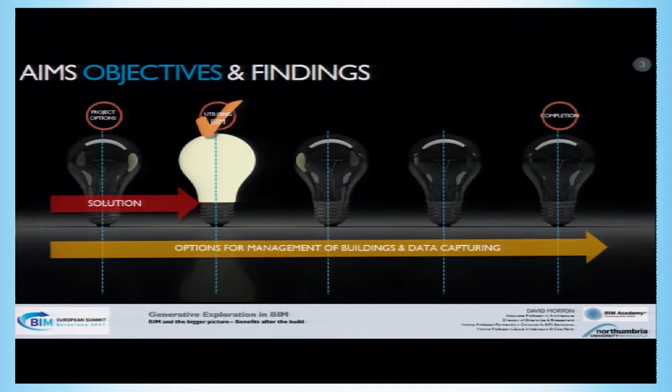What we've looked at with this research is how to utilise the data and how to capture it in a format that lasts the longest and allows us to have those moments of intuition when we think, let's go and try that out, let's go and try this avenue out. And no door closes. In fact, more doors open throughout the process.

So in terms of what I'm going to talk about, hopefully for the next 15 minutes or so, is looking at changes in terms of perception, eBIM, scan to BIM, heritage BIM, and then focusing on the case studies, those three main timelines there, and then with a little clock at the end, hopefully being on time about 10 or 15 minutes.

In terms of BIM, to give you some context - it's to aid construction, a new process to support and encourage collaboration, and in terms of improving efficiency and accuracy, that's a really important one that I'll take all the way through. Also to reduce waste and cost.

Now that's applicable to new build, as we've heard today, but in terms of heritage BIM and digital capture of heritage, that is also really important, and I'll go through that in the case studies in the later slides.

In terms of developing rich models, we've heard about that again today. But in terms of heritage BIM and scan to BIM, there's opportunities within this environment to capture huge amounts of data at fantastic levels of accuracy we've never perceived before. When I was a student 20 plus years ago, I would never have thought we could capture existing buildings to the level of detail my students capture now when scanning buildings for projects - we're down to millimetre accuracy. I was lucky if it was down to 50 millimetres.

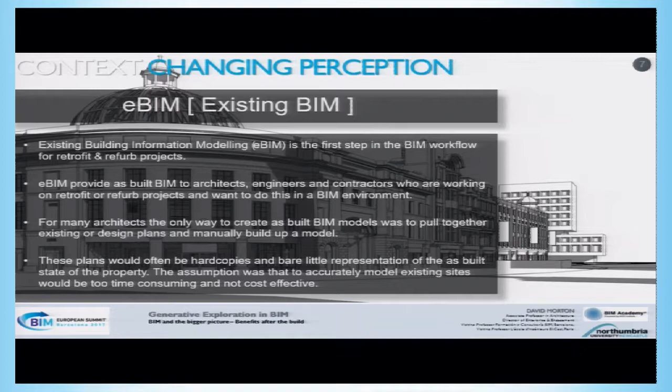What we end up with and what we generate from this is the model itself, and then from that we generate all the pictures, the views, the sections, the elevations, and we abstract them. Whereas before we would have done it longhand, we now have the chance to abstract from one source, as we've talked about, and that's also really important.

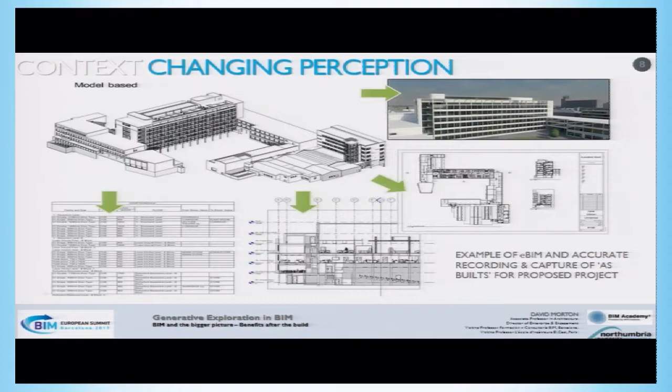On our own campus, we've done what it says on the tin - we are practicing what we preach, as it were. Our own campus has been fully scanned, and all of our buildings are now on a kind of digital campus.

So we can look at ways of looking at energy consumption, even down to looking after things like we talked about this morning - the cleaning, the painting, the maintenance. You can imagine every day we have hundreds, thousands of students going to many hundreds of lectures. Now, if one thing goes wrong, there's a huge repercussion. So on campus, we've got this as a management tool, but that can be used in terms of heritage as well, as a management tool for looking after the buildings. So it's no different.

In terms of research, there's very little looking at BIM in terms of heritage buildings and cultural landscapes, in terms of traditional ways of documenting heritage buildings. It's quite shocking, actually, and quite amazing what little information some people have. English Heritage and so forth, and all the other big players that look after our heritage, they sometimes have very little information, very inaccurate information about the very prominent buildings.

In terms of techniques to bring that forward, scan to BIM and so forth, it's been an absolute godsend. I'll give you an example, in terms of heritage BIM, okay?

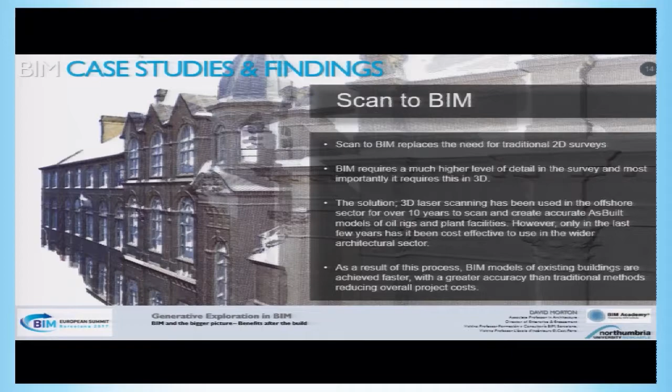In terms of our surveys and the research we're doing, we're finding more and more people wanting us to do citywide scans of various bits of the city, to look at different ways of implementing new road structures or different ways of routing pedestrians, like we've seen this morning.

Another example, outside of Durham Cathedral, there were various elevations in this particular case study that suffered really badly from erosion due to traffic and so forth. Before, it was a case of going there, checking whether that particular elevation had suffered anymore over a shorter period - every 5, 10 or 15 years - but if it was looking particularly poor, they would go back every 6 months, every couple of months, and monitor it.

Now, with the scans we've afforded the client, they have accurate surveys of every elevation, and we can predict far more accurately, with a very fine grain of information, when particular facades will need doing. We can say, okay, within 3 months you need to do this, it's critical; within 4 or 5 months you need to do this; and that budget you have there, don't worry about it, because that elevation doesn't need doing. Looking at the erosion over the last 2 or 3 surveys we've done, you don't have to spend any money for another 18 months or 12, whatever else. So the information is extremely data rich in terms of what the client can glean from it.

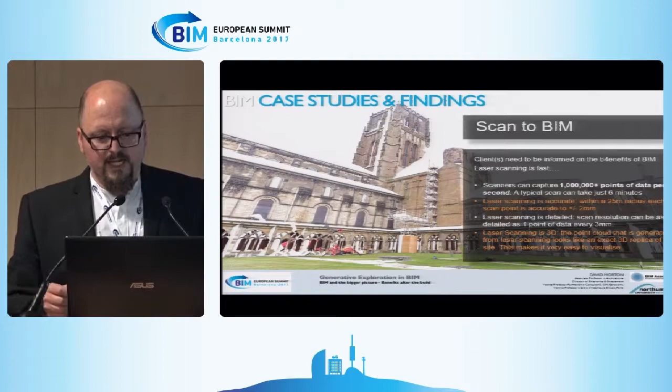In terms of the scanners that we're using, I know this improves all the time, it's the same kind of thing with phones. Typical scanners that we use now capture 1 million points of data, and it just takes 6 minutes. I mean, that's unheard of.

In my lifetime, that's gone from the measuring tapes where you're pulling the tape, and if the guy was really heavy on one side, the tape might stretch a little. She might be a little bit further out on one elevation than another, and you work out why that elevation doesn't quite fit when you go back and do the CAD. Now we don't have that.

It gives us fantastic levels of information. For example, on that third point there, 1 point of data every 3 millimetres, so we can be that accurate.

In terms of a process, this has been talked about this morning, so I won't go on too long. Very simple scan process, sometimes in some elevations down to literally minutes, 6 minutes for some of the elevations. The process itself: take it back to the lab, start to process that, get that into a digital model, and then give that back to the client.

What we do is we talk them through the model, we allow them to understand what they've got. It's a bit like the good old days when you just had the 2D information. A lot of clients can't read drawings, and we forget that. We're part of a larger team where we could share drawings, talk about pictures on the screen, and we all know we're all there. A lot of clients can't do that.

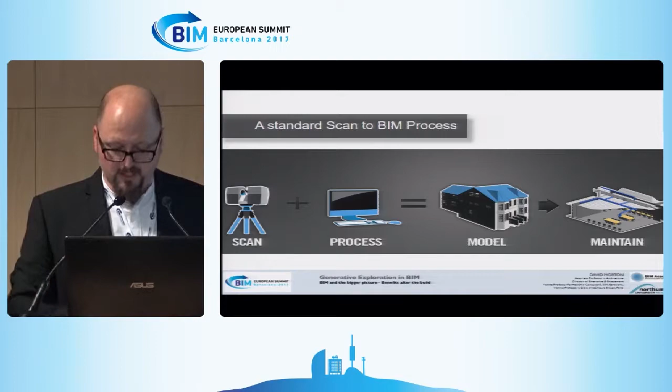When we produce the model and talk it through, it's amazing how clients who thought they knew their buildings understand it at a far greater level. That's a great bit of the process.

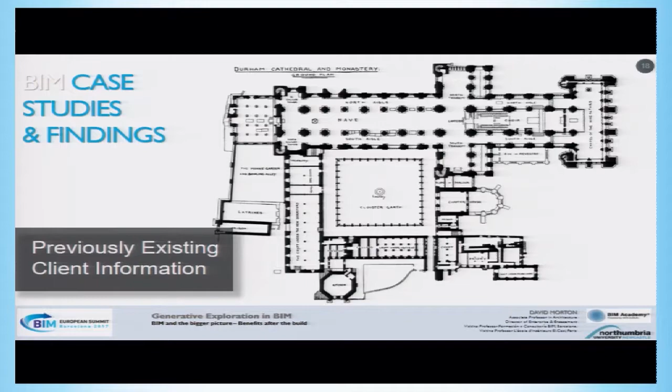I'll give you an example. That's what the client had before. When we went to Durham Cathedral, that was pretty much the only information we had, and some of those drawings, I've actually scanned, were on parchment. So there's a big time scale there in terms of information. It's a long, long time ago.

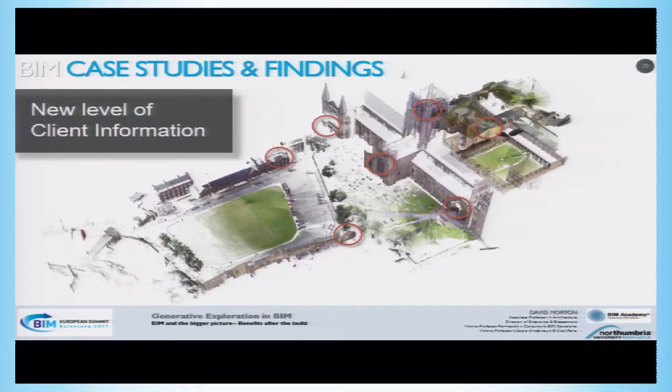What we do now, we scan and produce this kind of information, and a lot of us do this now. All of those points starting to come up on the screen, little circles, were critical points the client never knew were a problem in their own backyard, in terms of facades needing remedial work, stones needing replacing, that kind of thing. That's a great thing in terms of capturing and looking after our digital heritage.

Again, you saw the picture inside the building. This is a scan outside the building, again down to 3 millimetre accuracy. So the client not only has elevations, but accurate elevations, very, very accurate. It's a physical recording of condition, for preservation and maintenance.

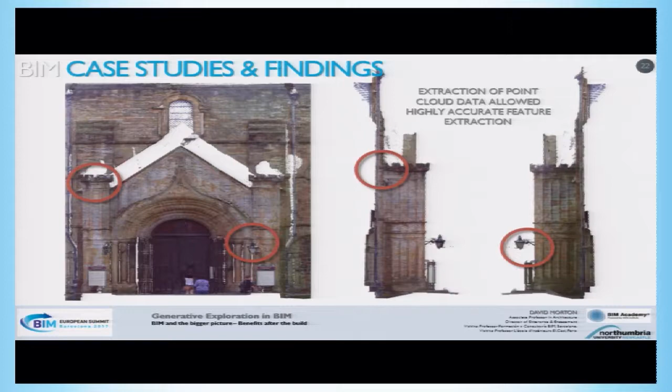Creating not just elevations of the building or parts of the building, but detailed elevations that allow studies to be done and data to be captured in order to maintain. That's a lot more important, really important to think about. The data allows us and affords us the chance to maintain correctly, not just look at a drawing, compare it to the building and make a decision. This information allows you to make that decision straight off the bat.

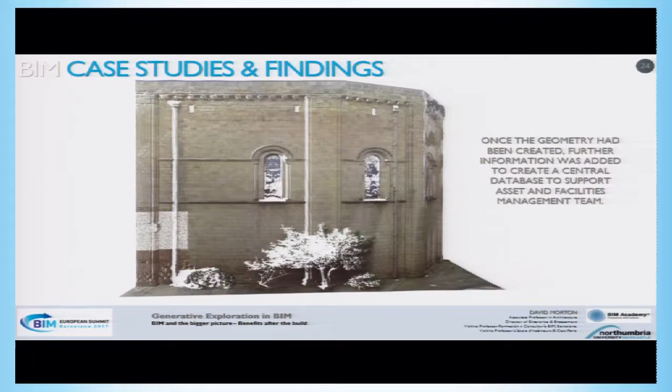And again, in terms of external, once you've captured that geometry, you can add further information. This particular part of the building has various acoustic additions for services and so forth. We can track all of the lighting fixtures and fittings, and give the client a database to assess and look after their assets within the building.

And in terms of condition surveys, doing something very simple, a kind of see-through axonometric of the building, then colouring it in terms of what to look at in 5 years, what to look at in 10 years, and what doesn't really need looking at for 15 years or so.

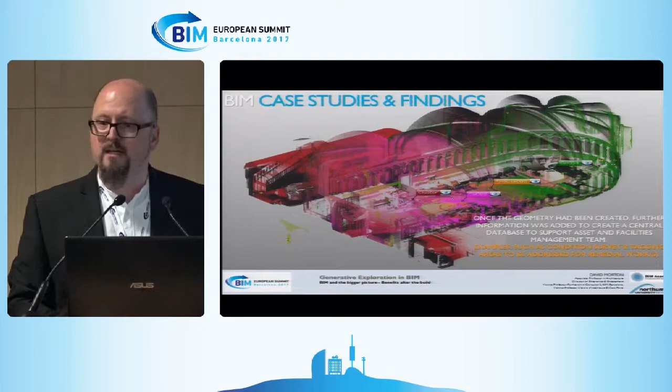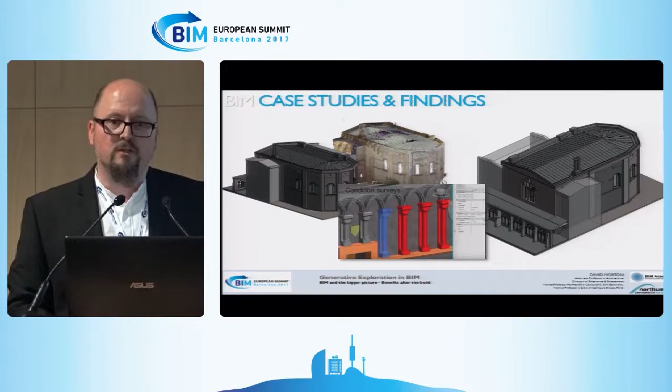And again, from that model, generating sections and elevations for potential structural works and accurately recording those, so that when somebody comes back - a different team, a different company, a different structural engineer, whoever it is - they have records there. They can just pick them straight up and start from the same paragraph, the same page, the same sentence.

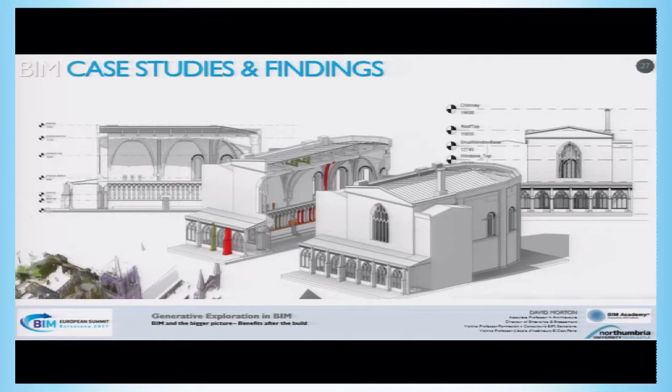Also, in terms of that data, bringing it to a device that the client will want to use. We've noticed this a lot with the research we've done - it's great to provide the information, but then there needs to be a device to hand that over to the client. More often than not, we all have iPads and phones, so we give the client an iPad and they can walk around the cathedral, or any project we've done, and flick through the various bits of information while they're there.

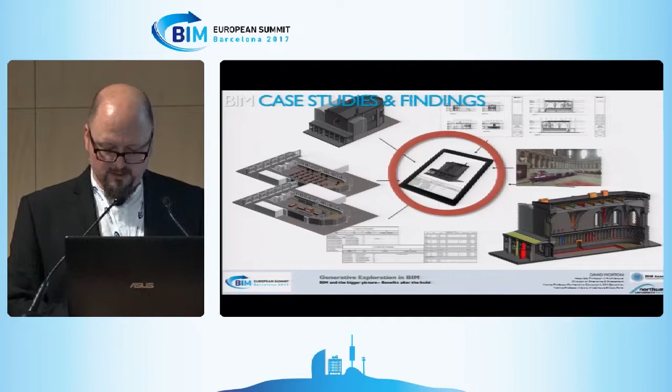There's an immediacy there, there's a level of detail there, that I think BIM, Heritage BIM, and everything else we do really benefits the cultural heritage of what we have around us.

And some case studies, just a heads up on what we found that works. First one, Sydney Opera House. We were lucky enough to win this particular scheme, and we created a full information system that's now embedded in all the operational methods they use for the building, allowing for cost efficiencies and supporting the visitor experience.

It's a bit like with the campus, keeping everything running very sweetly - the whole thing is constantly maintained. So we have a geometrically accurate model, but it's great to have, we also have to make sure that we maintain it. We have an accurate model that is maintained via us at a particular point.

So when they know they're going to do any alterations, we record and capture those. What the client calls stress testing - in terms of potential existing or proposed future operating systems, we can add those into the model and test them in terms of heating, cooling, load, and that kind of thing. Will they work? Won't they work? So that they don't have any issues and have minimal downtime.

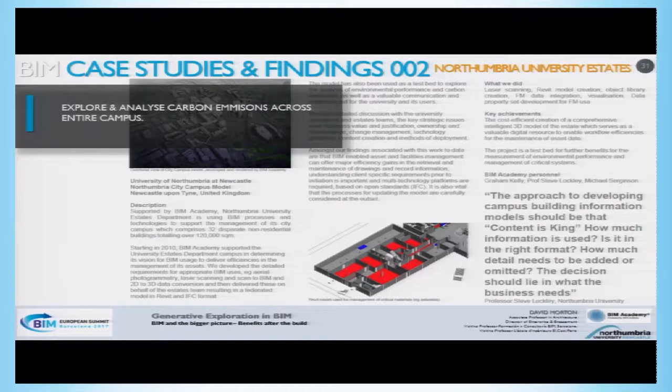And then our own campus, Northumbria, we used it to explore and analyse the carbon emissions across our campus to minimise those, and to look at the intelligent models across campus so that we have an accurate resource for creating additions and changes to the buildings.

I've been at various places you work, I'm sure you all have. If you work there for more than 2 or 3 years, you will notice how many times things get changed. I've been at Northumbria for 8 years and I've moved office 4 times.

In terms of that transition, we've used the model to make sure that not only is the maintenance done on time, but people like myself who work in the university know where we're going, how long we're going for, and that's all charted on the model as well. So in terms of a benefit to the client, it's massive.

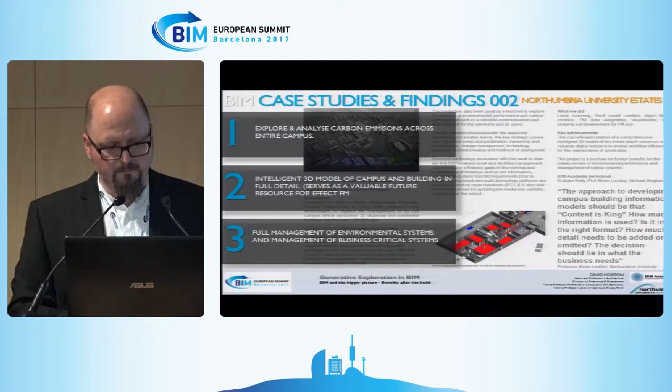In terms of full management of all the business critical systems, we use the same model again to make sure that all of the lecture theatres are used most effectively and efficiently, and if there are any issues, to log those and make sure they're done from one source.

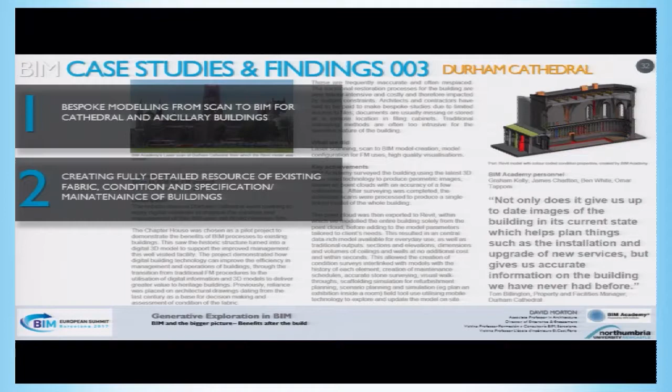And we talked about Durham Cathedral. In terms of that particular case study, that was the bespoke model, scan to BIM, and all the ancillary buildings. That was to create a full detailed resource in terms of fabric condition, specification and management of the buildings, and an accurate condition survey. So the guesswork, or accurate guesswork over 5, 10, 15 years on the quinquennial surveys, is now scanned down to 3mm accuracy and planned far more effectively in terms of client spend. The final case study, on a bigger scale, actually ties in with the keynote today.

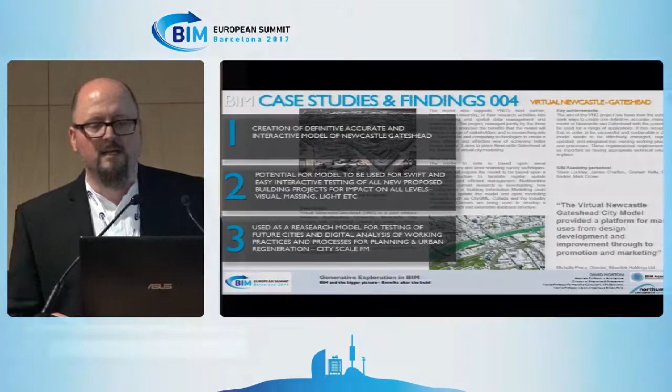Newcastle Gateshead. Many cities have the issue where you have brand new projects and you want to take out a part of the city and put in a new building. How many times do we have issues where people stand up in a planning meeting and say, I don't believe that building's that high, I don't believe that building will overshadow my building, or this will happen, or that'll happen. What we've done is accurately model the city to allow any projects to be modelled within the virtual model before the physical is made. So there's potential for swift and easy interaction with testing of those, and also for looking at future potentials in terms of digital analysis of different processes, planning and urban design of the city.

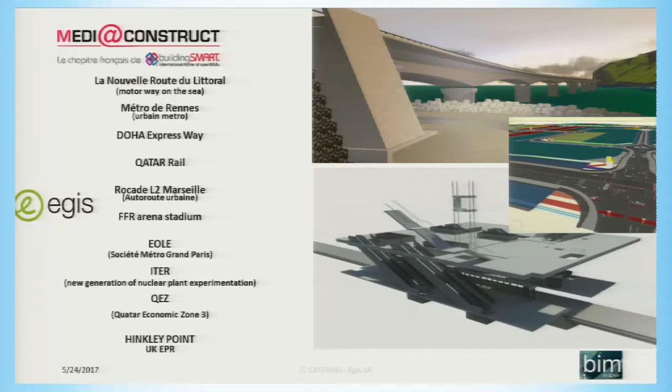BIM now - Egis is a company of engineering consultants, around 1 billion of turnover per year, now more, and 60% of our activity is not in France. But in BIM, what does it mean today? That means all of our crucial major projects are under BIM, all of them. That means today it's not less than several dozens of billions of euros of works managed by Egis under BIM. So BIM is not the future; it's really involved.

So what I'm going to explain is, first of all, what are the processes and principles of BIM we are using, based on our experience as professionals, but also as part of our development and research on BIM. And I'm going to explain two business cases. One about the motorway in Marseille - we won the first BIM award for infrastructure projects in France with this project a year ago - and the project about Société du Grand Paris, which is one of the biggest projects in the world for railways. It's more than 25 billion of works together, with not less than 21 tunnels under Paris over the next 10 years.

So our approach to BIM is oriented around the question of the BIM execution plan. We're familiar with that, and when we say that, we are mixing two references. The first one is the ISO 19650, which is not yet approved in ISO, but is mainly based on the British standard 1192, which is important to note. The name of that is 'information management using building information modeling' - so everything in the title is important.

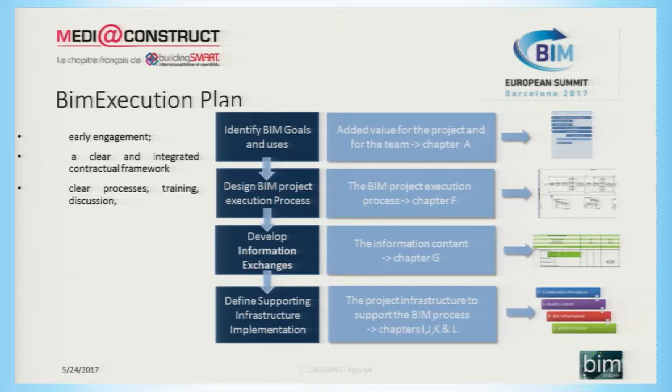Full BIM - we have some reference requirements from the client saying full BIM, but I don't know what that means. Nobody is able to say what full BIM means. So you have to identify, according to your project, why you are using BIM and for what. In other terms, identify the BIM use.

Because BIM use also means added value according to the process. Then you have to describe the processes themselves, and then develop how you are going to exchange the information. In this part, that's the way we mix British standard or ISO 19650 with Penn State. And then define how you are going to work, the infrastructure of the BIM.

The keywords are the following: the definition in the ISO standard is the use of structured data and information to support the delivery of a project and operation of an asset.

That means in our activity we are going to deliver two things, two assets: the real one, the construction, and the virtual one. That means the delivery of BIM is also a value, also a delivery, also an infrastructure to be managed.

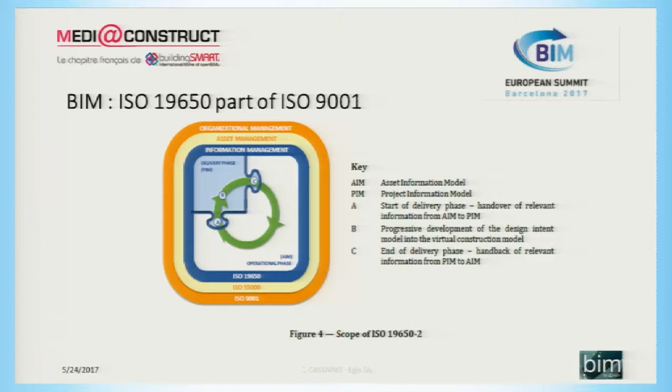We consider that BIM, through ISO 19650, is just a part of that, inside that. BIM is not outside, it's not something more - it's totally embedded in our processes. It's really the philosophy of ISO, and we are really supporting this approach.

The second thing is crucial, really important, because everything I said relates to that: how to decrease the cost of delivering and how to be able to have more discussion, more co-design, going in the direction of the famous Patrick MacLeamy curve - how to make all the modifications very early in the process.

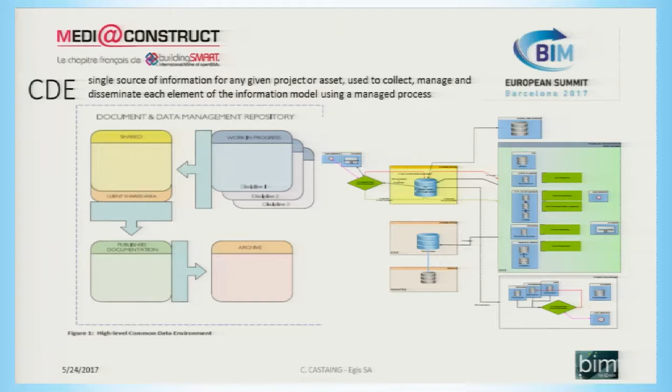It's the question of common data environment. In the common data environment you have two key concepts. The first one is you have to develop your own activity for yourself, and then decide when you want to associate your information with the others.

So you have two concepts about that. The question of workflow management - that means work in progress, fit for coordination, fit for approval, and so on. That's one concept. The second concept associated is the question of shared space - meaning you are going to share information, not spend time creating drawings, but create this space to share with other stakeholders, for discussion about acceptance and communication.

So on the left part of the slide, you have the approach of the ISO. On the right side is an example of how we are developing the CDE in our project in Egis, based on the authoring tools on blue on the right part of the schema, and the share space on the left side. I'm not going to make too much advertising for Bentley, but in our case we are deeply using ProjectWise to manage at the same time the share space and the workflow.

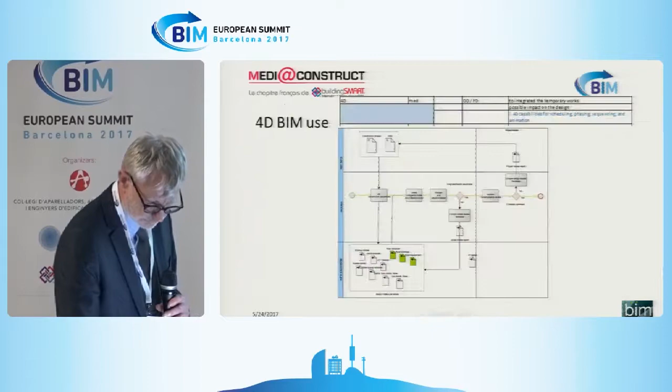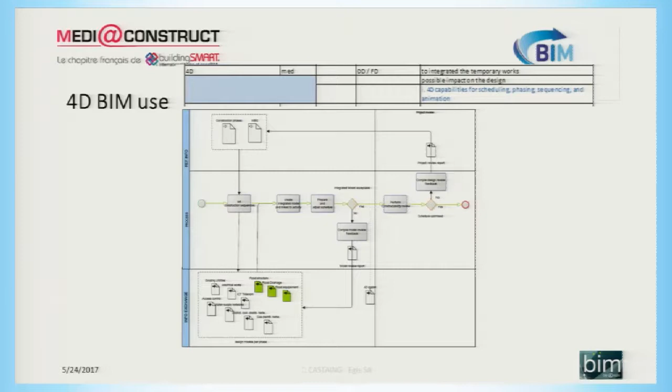Okay, so in Penn State you have to develop the BIM uses and the process map associated to the BIM uses. Why do I want to develop that? I'm going to come back because it will be too long if I explain more there. So a key moment of this delivery is a question of the project review.

So to develop a project review, you have to develop the process around that. What does it mean? That means that you are going to... there is a problem on the slide because... tant pis. Normally there is an animation with different slides.

Okay, I wanted to show the different process of approving, modifying the workflow. I am a work in progress. In my QA/QC, I have a project review or model review. So if I agree with the content, I say okay, now it's fit for coordination or fit for validation. I change the workflow, but I maintain the name of the file.

Because it's a way to say my file, my information is unique. I am not going to... I share that, and the information is unique.

And why is it important to say that? Because one of the typical requirements you have in contracts like FIDIC is to maintain the records of the evidence. Don't forget that BIM is under a contract. And the question we are trying to solve with BIM is a question of responsibility, of who is the owner of the information, who has the responsibility of the design and so on. We have to maintain this information. So BIM is much more than a question of geometry, 3D and so on - it's your responsibility, your contract management.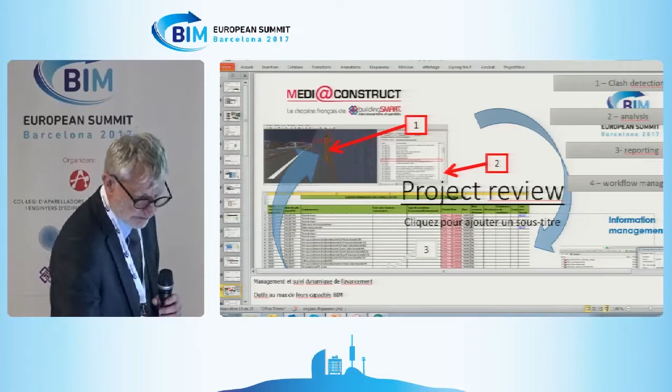So briefly, two use cases. The first one is an example based on the motorway in Marseille. So I'm going to... I need to explain that.

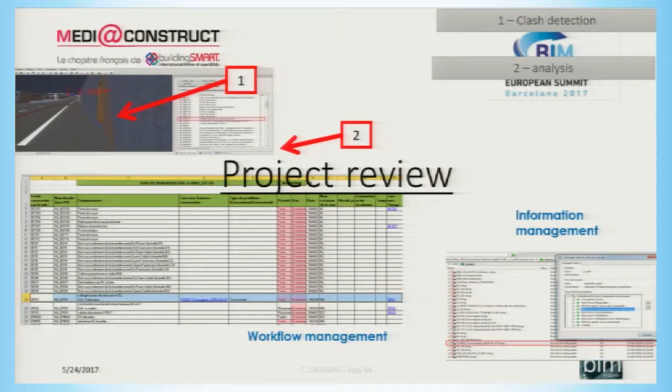So the idea of the project review is to orient, through an integrated model of all the project, first to analyze through clash detection, then to analyze the clash detection results, to organize that - because a clash does not mean anything by itself. For instance, if we have a clash on a pavement, sometimes you want that connected, but sometimes you don't - you want to have a space. So you have several ways to manage the clash, because when you run a clash detection process in, for instance, Navisworks, you obtain thousands of clashes.

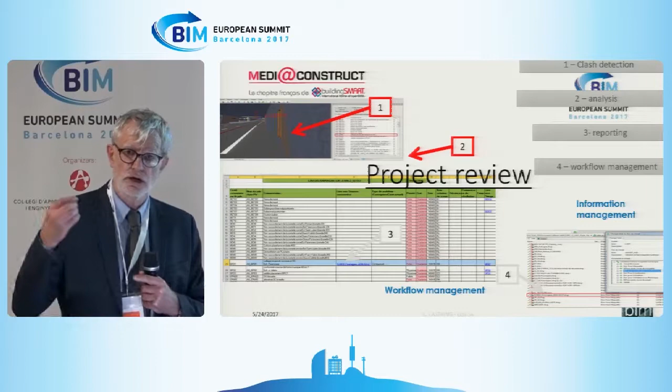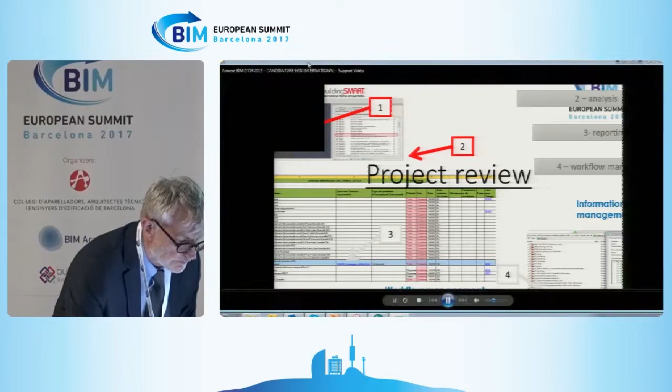So you have to organize that, then report it - important to report, and how to report - and then report this information not only to the design team but also in your CDE, to aggregate to your model and your design all of this information related to what the problem is, and so on. So just to prove that, here's the example - you have all of this in two minutes, all of these steps.

First of all, on the right you describe the information model by model, and what is very specific in infrastructure is that you also have to describe the space organization, not only - and you have a huge number of models. I'm going to stop here because everything is perfect except that. Not except that, but it's mainly that.

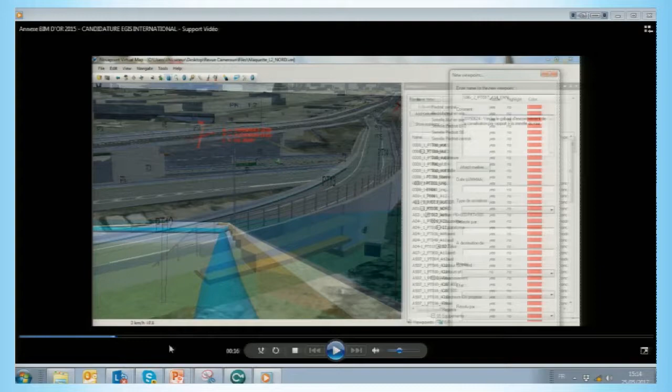Okay, you have here - I try to stop, please. Okay, well, the picture looks good, except that if you look at this information you have here, in French it means cross-section number 12. So how is this information coming?

That is a big problem, because we create this information inside the integrated model, since we are not able to extract it directly from the authoring model. There's another piece of information missing when using eNavigator or Navisworks - there's no counter-example of that. There is no integrated tool like Navisworks or equivalent in the world able to provide this key information: where am I? Not in XY, because we don't care about XY - where am I in terms of station, chainage, and offset.

There is no tool able to do that. You have no tools. You have this information in Civil 3D, you have the information in Power Civil, but when you integrate the model in Navisworks, you are losing this information. Okay, that's the bad news. Good news is we were testing in Barcelona a month ago. We had the presentation by Autodesk, Dassault Systèmes, and Bentley, that through IFC alignment, we can say that next year you will be able to manage this information.

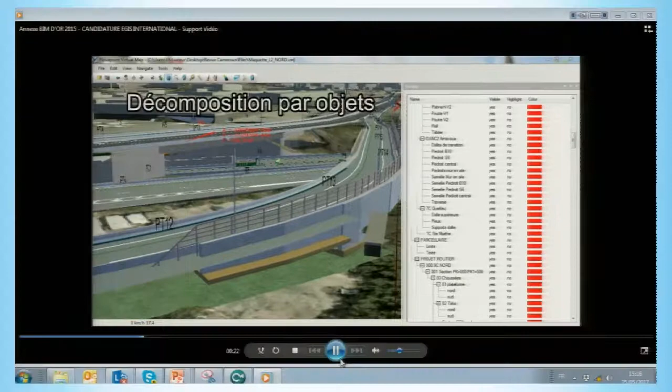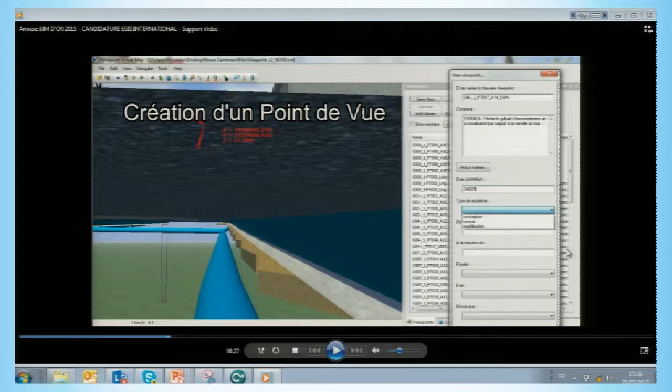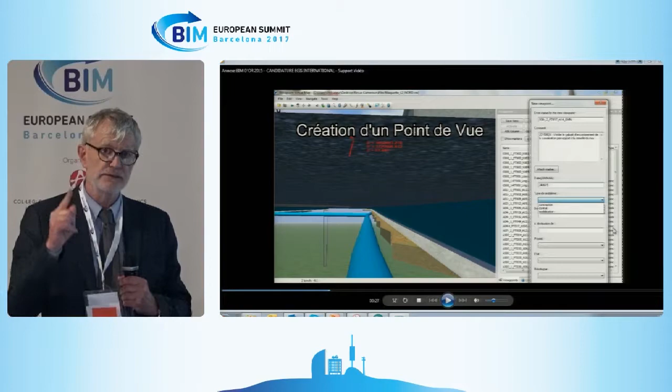It's a software issue. And the second thing where we have a problem: you detect a problem or a nonconformity, and you create a viewpoint. You have this functionality of viewpoint in all software like Navisworks. The question is, this information, which is crucial because it's contractual information, how am I able to keep this information and associate it with the model? You have one possibility with BCF, but it's only one, and this information cannot be associated directly in your common data environment. But it's your contract management. That is a big difficulty, and it's not solved today.

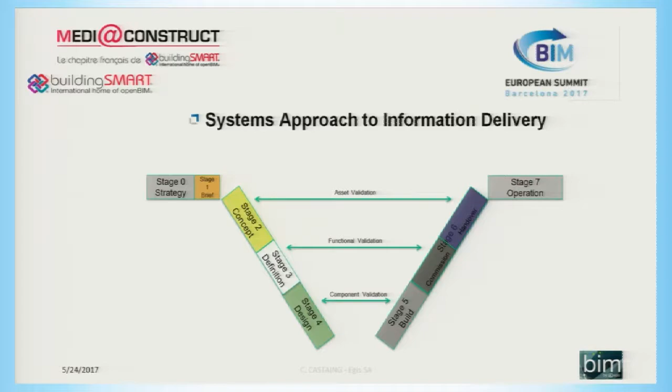Just to underline the importance of what I'm saying: when you are designing, we use this V process, which comes from the manufacturing industry, to say when you create something, you have a V process. On the left, you have the design, and on the right, you have the commissioning or the handover. All of the information I mentioned in terms of workflow, clash detection and so on, why is it important? Because it's a way to prove that you are compliant with your program. And when you arrive in the construction phase or during the handover, you need this information to verify that you are still compliant. That's very important for the continuity of the system.

So I come back to the second business case. I'm going to speak about infrastructure, railway infrastructure. We can say that today, and it will be the same tomorrow, that it's the most difficult thing to build in the world. To create a plane, to create a car, is much easier than to create a railway network. Much easier. Why? And you have this explanation.

Because when you create a railway network, you have to manage the infrastructure, the civil works, but also the bridges, the stations. You have to manage huge information called environmental issues, bigger than even the design information, bigger. And it was not managed by the CAD system, it's managed by GIS. And you also have to manage all of the systems, rolling systems, connected systems associated to that. So the question of how to create this common data environment is really a difficulty.

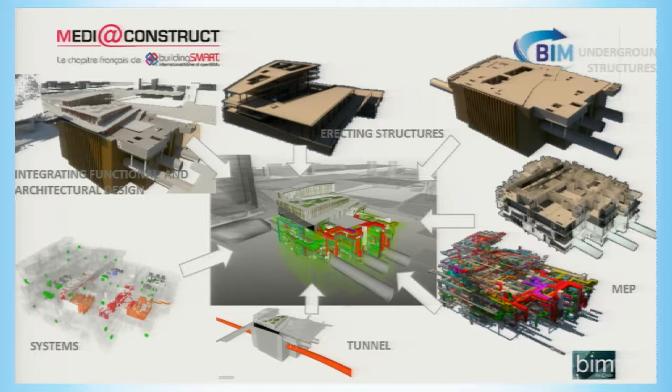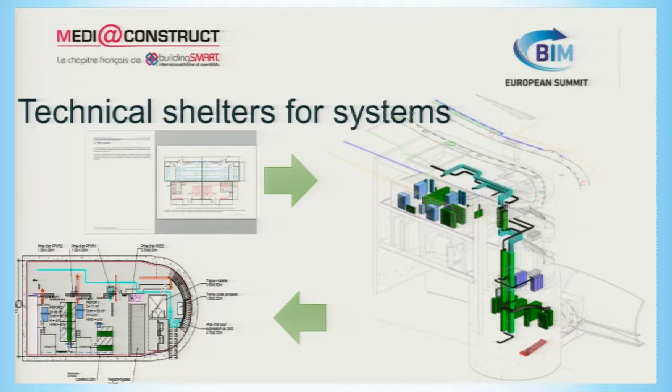And it's what we are going to do with the Grand Paris project. Going to go as fast as possible here, but you have a picture of the complexity of the problem, of the interfaces, and so on. And what we are doing about that is to define what is not done at the moment, because in any case, some industries already have this information, but not the construction industry. The question of how we have to modelize these systems.

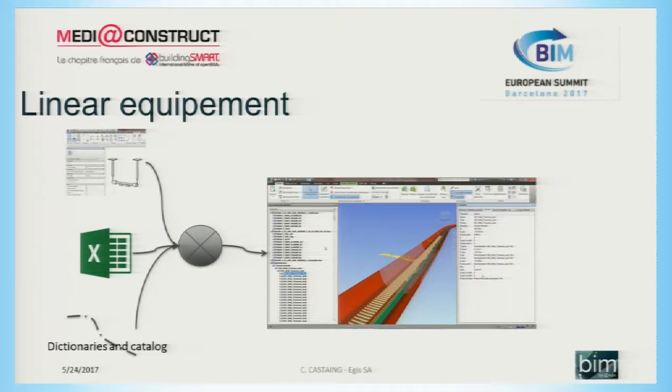Systems could be the earthworks, that we know, because it's earthworks, but for instance, everything related to the connected objects which are already part of the railway system are to be modelized and associated to the civil works. Tunnel, we have a problem, and one of the tasks we are going to do in Grand Paris is to create data dictionaries for all of the equipment related to railways, in order to prepare the schema for the extension of IFC, but also to be able to connect this data dictionary and object type libraries to the catalog coming from the manufacturing industry already here in the world of railways.

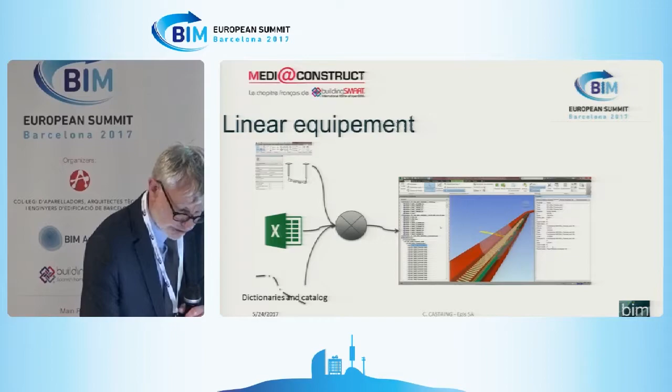And what I mentioned is because in this scheme, I mentioned that on the right part you have IFC. Everybody knows IFC, but on the right part you also have what's called AP242, which is a standard based on STEP, deeply used by industry, including the aircraft industry. They are using that. But if you are speaking about Alstom, or Thales or SPIE, they are working with this kind of standard. And we don't want to recreate 3D information because they are already building their technology and their objects with this 3D technology.

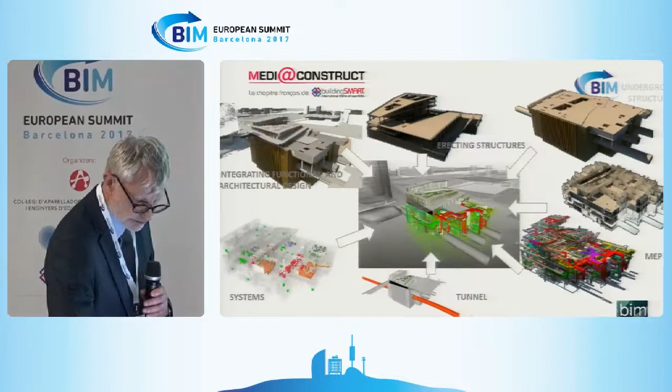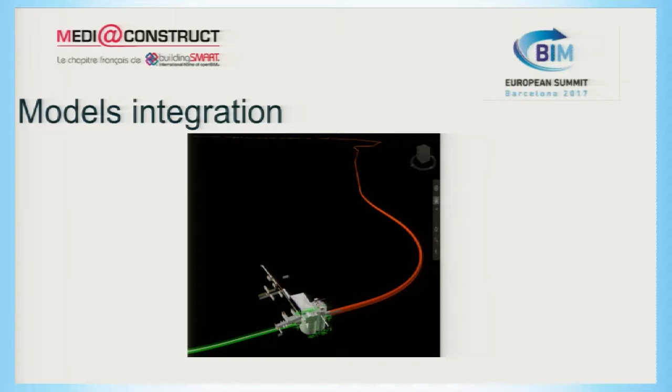And the problem is now crucial: how to be able to integrate all of the information on a unique common data environment. So we're going to conclude that we are working on this question of information asset management. We need interoperability to be able to do that.

Interoperability from now, how I am able to discuss from me to another one today. But the important thing is not today, it's tomorrow. What is going to happen in the next 25 or 50 years about this information, about this interoperability, if I don't have the standardization? And the quick question for the owner now has to be not if I am able to provide a BIM model today. Normally they have to ask you, are you sure that I will be able to reuse this BIM model in the next 50 years?

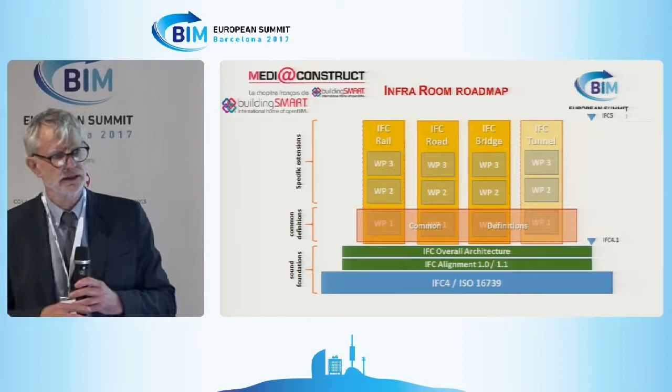That's the reason we are developing in buildingSMART this roadmap around IFC rail, road, bridge, tunnel, and maybe a geotechnical issue, with the perspective of 2021, something like that, with IFC 5 - but not only IFC, also OGC. We are developing the GML standard for the GIS part of the project, and maybe also what already exists in the railway industry, like RailTopoModel, plus what exists in the manufacturing industry, like STEP 242. Just to conclude in one word.

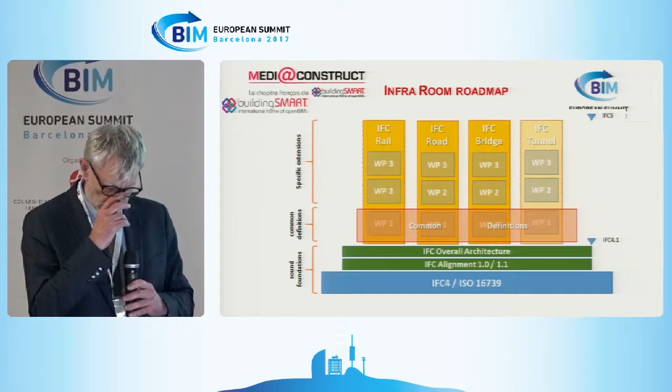We had some meetings with Dassault Aviation, which is a venture of the main industry around Airbus, and they said two things to us. They are going to unify around CATIA all of the information around the design. They say that, but at the same time everybody knows the key problem they had with the Airbus 380, the disaster, was because in France and in Germany they were not using the same release of CATIA. So they say now everybody is going to use CATIA release 6.

But they say they will do that under one condition: that all of the deliverables are available under the format STEP 242, not under Dassault Systemes format, but under an ISO standard. They say this first thing. And secondly, they say it's your job as the construction industry to develop your own standard. You have to learn that Dassault Aviation is saying don't rely on Dassault Systemes - they are not able to develop your standard. Do it yourself. Thank you very much.

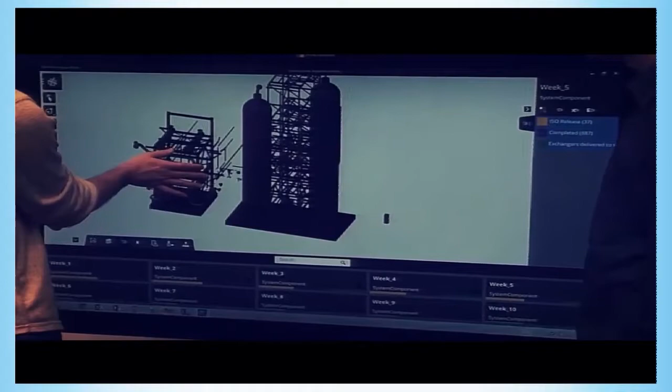Okay, a bit about Bentley Systems. We are a global company, around 3,000 employees, and our portfolio spans different industries - water treatment, infrastructure, obviously building, plant and manufacturing as well. And if you look at the built environment as such, obviously buildings are just a component of it, and we need to look at it in a comprehensive manner to be able to approach, especially when you talk about infrastructure projects.

This seminar is about the infrastructure project, so I thought this would be very relevant, and also a little bit about how we approach digital transformation. Maybe very briefly, I will skip a little bit here, but it's all about being able to be successful, going in the right direction, so we need to start with our appropriate strategy. We need to be able to have success in the implementation itself.

So once you devise the strategy, you need to have a certain success in implementing what you've planned for. And the other element is the people, the human element. We have a program that we've developed with Crossrail, but actually now we're building another one in Malaysia and in India.

And also in the United States, it's a program, an academy for enabling the supply chain to actually leverage the processes that the owners devised. And this is just very briefly another hat of mine. I'm involved in the industry, and this is an organization we've created recently around process innovation, and we look at connecting the biggest inefficiencies from the industry with potential solutions, and those might be technological, but might be process or methodology.

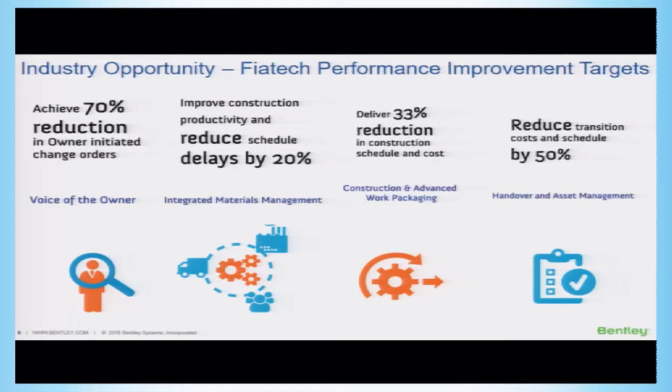They see those numbers are achievable. And we also have a little bit of a wow factor as well, a lot of different technologies: cloud computing coming, social networks, obviously Internet of Things and virtual reality. So there is a bit of hype in there.

And when we talk to the owners, you say, okay, what's your vision? What would you like your BIM or digital implementation to look like? What do you really want? And the owners want information availability. They want to be able to answer their questions when they run the asset. If it's an airport, a rail, a road, they would want to be able to answer questions around their assets at any point in time. Having the availability of that information at their fingertips, that's what is driving the owners.

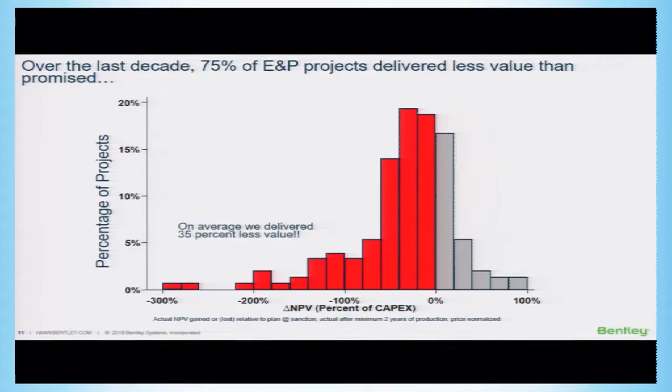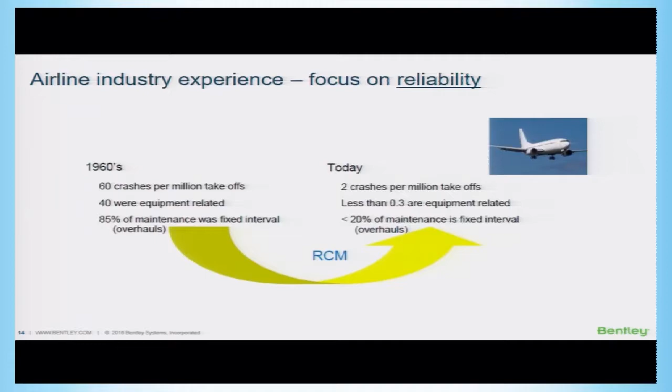Probably we should learn from the airplane industry and other industries. Christoph mentioned it already. But how can we focus more on reliability of your assets? Focus on being able to reduce your number of accidents. In the airspace industry, they reduced crashes from 60 to 2 crashes per million flights, but actually only 0.3 are related to technical problems.

Because us as humans are made not to produce, to execute. Those things can be automated. We want to leverage our brains to their fullest potential. So we want to move people from drafting to thinking, and we want to utilize information not in that way, but in this way, in a way that's structured.

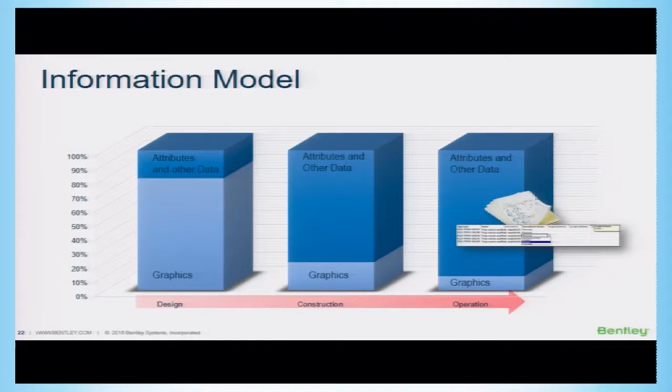Christoph again was talking about the information that needs to be structured, and he talked about things like asset data dictionaries, which, by the way, are being worked out already in the UK. So I'm pretty sure Christoph knows that, and there are a lot of initiatives around the globe that build data dictionaries for specific assets. The problem is that different countries have different interests, and it's a little bit political, so it's a bit of a utopia having one single asset dictionary for specific assets.

What I want to show by this image is that as you go towards the operation, less and less of the graphical information is important, and more of the data is important.

But actually, I was hoping to also show you a little bit of a different angle here, because not a lot of people in the industry are actually thinking about business, about how information and digitization will be changing your business. And the question here is, are you digitizing like Kodak, or are you rather transforming like Apple?

Kodak was the first to introduce digital pictures, digital imagery, but failed. The reason is that he didn't leverage that technology to its full potential, changing the business models around which these innovations can provide value.

This is one of the case studies here, an example. I've been recently involved in Sydney Airport, and when we started their digital transformation and a roadmap, we looked at: okay, how do you make money? Where is your profit coming from? And where are you charging? What's your business model? How can we support you being at the forefront of the airline industry, and therefore also being as profitable as possible?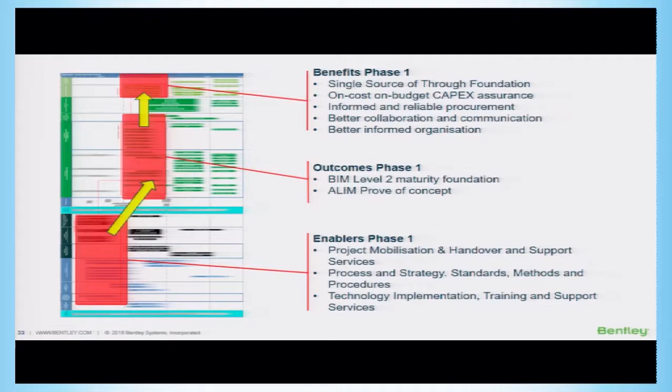Such a roadmap would then obviously phase the different change. It would be split between technology, obviously strategy, and processes, and then we would look at connecting the different bits and pieces. So from the outcome that you see above to the benefits to the outcomes, and then to enablers, because technology is an enabler.

Talking about the organizational change, I've mentioned it before, the Crossrail BIM Academy. It's really where whatever we have devised in terms of a strategy has been exposed, and we were enabled to educate the supply chain of the biggest infrastructure project in Europe. Now it will be superseded by High Speed 2, but by the way, High Speed 2 is also having a similar approach, and we are involved quite heavily in there.

So processes, I'm skipping a little bit. Where is the value? You know, the research of the value. Where can you extract value - monetary value, cost value, but maybe it's safety, maybe it's reliability, maybe it's image, you want your reputation.

Let's take an example, because I've been involved in Sydney Airport recently, for them reliability is hugely important because it's the most important asset in Australia. All the planes are coming to Australia, and it's hugely important. So being reliable, being able to provide that service, it's important.

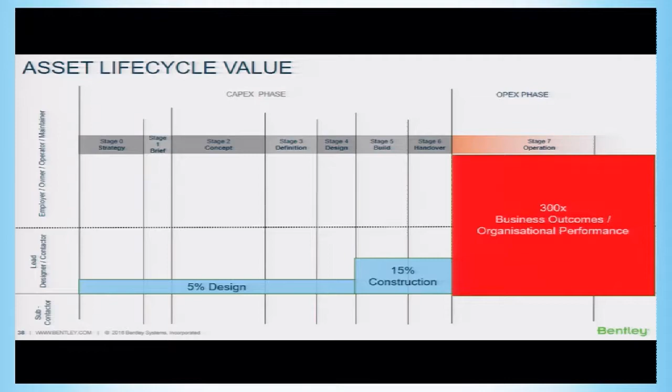Because at the end of the day, an airport is a business. They generate money. Sydney Airport is owned privately, it's on the stock market. Railway depends, but the Virgin trains for sure are privately owned. So it's about being able to generate those returns.

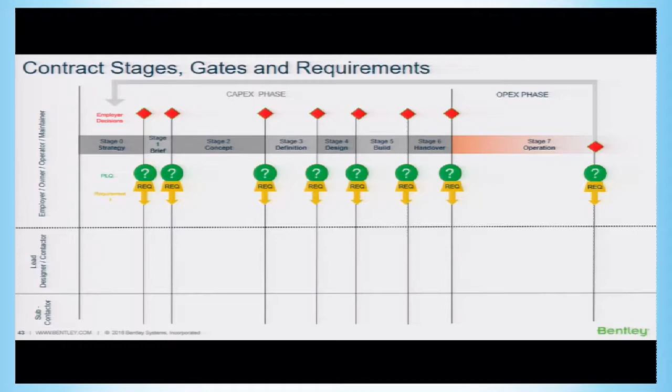So it's a process, and if you look at the different phases, and because of the time, I will be very fast. At every phase, you have certain questions to be answered because certain decisions need to be made. So it's very important to devise a process in a way that those questions can be answered at any time, and the supply chain must be able to provide the answers to those questions.

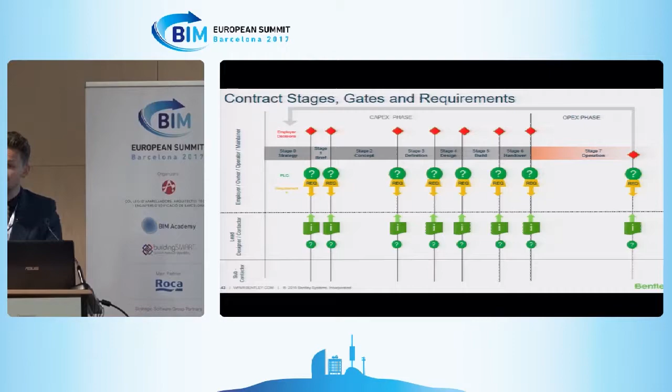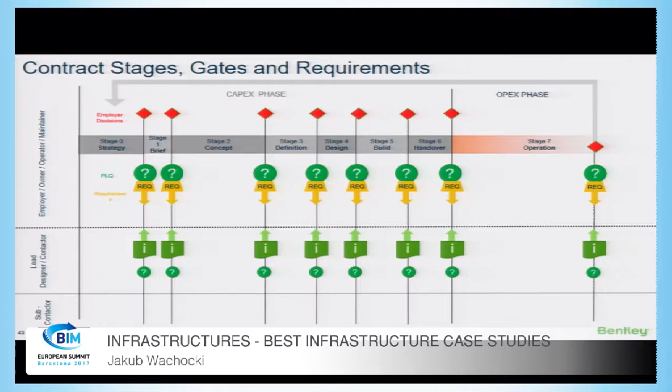We mentioned execution plan, we mentioned EIR before, employer's information requirements. Nobody talks about plain language questions - what is the question that the owner or the builder or the designer wants to answer at any point in time? And where we looked - for instance, very recently, last year, I've been involved in a project in India - we'll skip here.

The first thing we started with is what questions your operators, maintainers, and cleaners have. You can't imagine how much money is being spent on cleaning an airport, a huge amount of money. How can they optimize that? Cleaners don't know exactly where to go. They don't have full visibility of, for instance, which gates are being occupied when, like classrooms at a university, so when can they go and clean? Systems can enable that.

It's all about having this visibility of information, and it's also about connecting all the different types of information through an ID, a unique identifier. And when I talk about different types of information, I'm not talking just about 3D modeling. I'm talking business information, enterprise level information, coming from different sources together, and the common denominator of these different sources is an asset. So it's an asset-centric approach, because an asset is not just a physical asset.

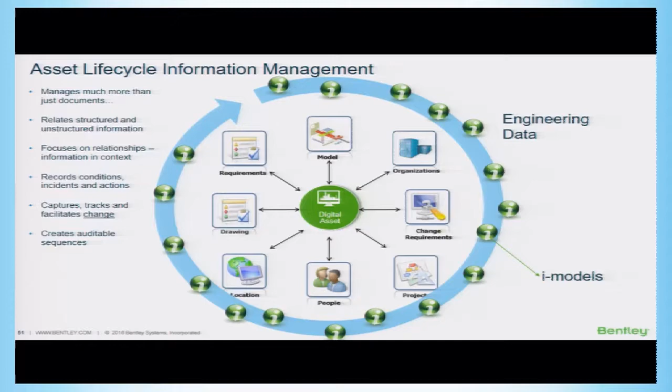It's Wi-Fi, so it's a service potentially. It's people to perform a service. If you look at a shop, obviously the shop is nothing without people. You can automate it as well, but let's assume you need some people, some employees, to run a shop. They are also an asset. They also need to be defined. They also need to be managed. I also need certain information about them, and so forth.

So again, I will attempt my own definition here, because everybody does it. For me, it's about business information management, and it's about value. Actually, if we could remove this word, it's about digitally empowered business processes, because of that life cycle. We want to look at the life cycle, and we want to look at how you can hand over seamlessly, constantly, the information from the supply chain to the owner, so the owner can make decisions.

Did I run out of money? Do I need to close the project because I'm over budget? I didn't think it was going to cost that much. You want that transparency at any point in time to be able to make the right decision.

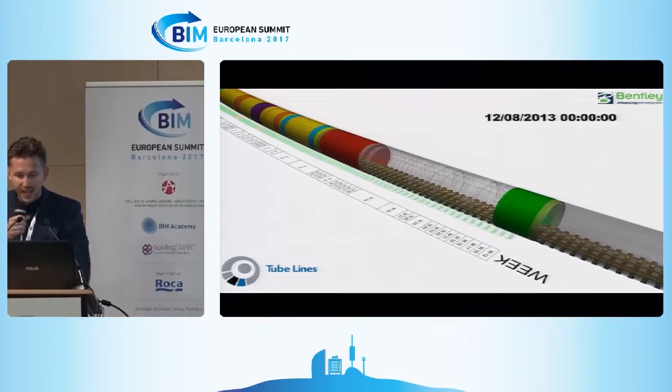So a couple of other examples here for rail. This is a Tube Lines example, where they were able to utilize the technology to obviously model the area around the rail, but also to be able to inform the communities of the impact of that infrastructure. I'll skip that since you've probably heard about it, but again, it's about 4D planning, building the digital and the physical asset at the same time.

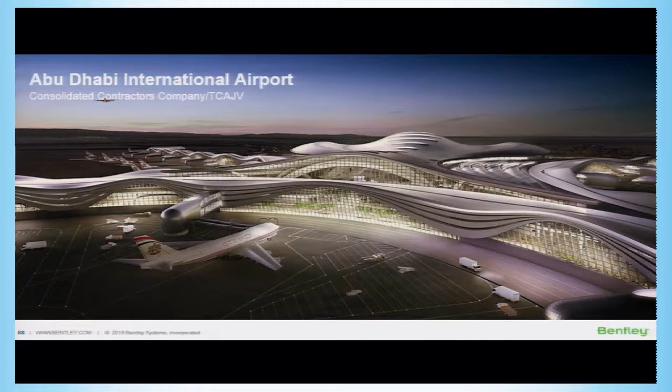Digital airports—one of the biggest examples, I think, or the most mature, is Abu Dhabi International Airport, where the information was utilized for construction management and for asset management as well. There were a number of considerations and strategies around conditions monitoring, about looking at managing change within this facility, and relating different types of information, as I mentioned—projects, people, locations, and so forth.

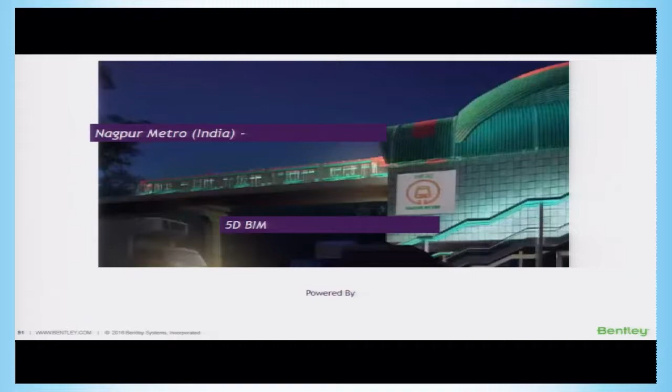And the last one, which is quite close to my heart because I love curry, is Nagpur Metro, and that was last year. We are now actually involved. Okay, I need to finish. I know—if too many stupid things are being said, there is an alarm set.

So Nagpur Metro, very briefly—you might have seen it, and I was actually involved in devising the governance strategy. So, employer's information requirements, BIM execution plans, but also looking at asset dictionaries and so forth. Their goal was quite ambitious, taking it beyond BIM level 2.

I must say that this is just a vision, because if you try to transform an industry—the whole industry—in a couple of years, an industry that's used to 2D deliverables, you're not going to make it. It's a transformational process. You need to enable them through a number of initiatives—awareness, academy—but you also need to incentivize, and also create the right contractual agreements with win-win solutions, so everybody is motivated to do so.

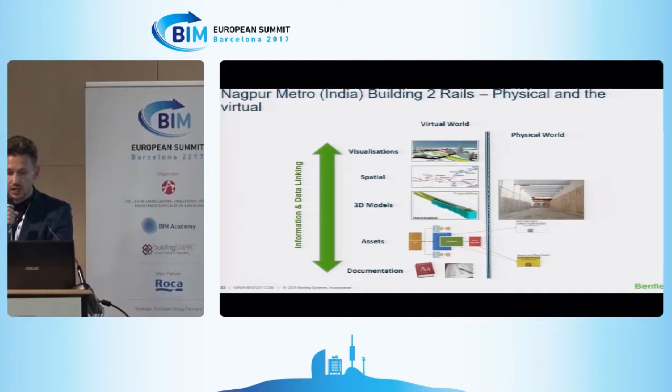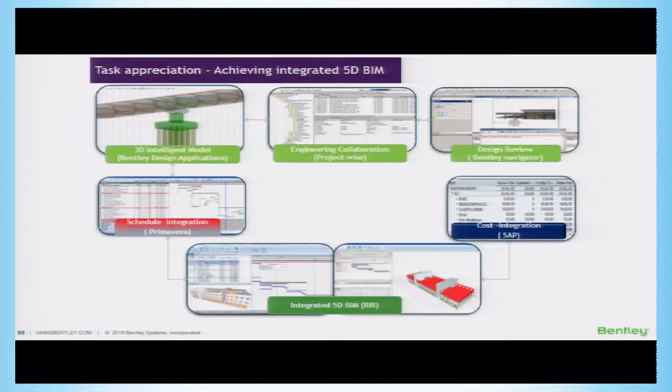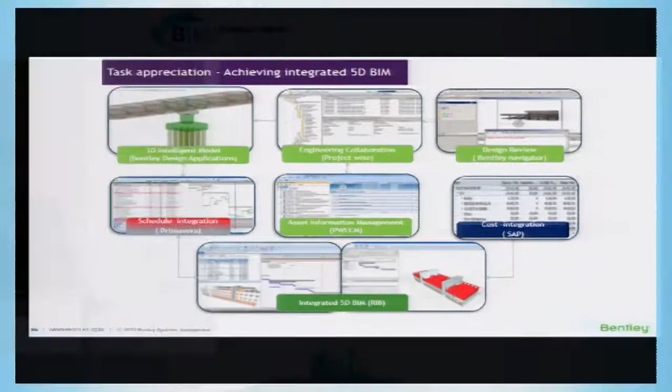Nevertheless, they started to build on that journey, physical and virtual worlds being connected. It was a 5D approach, where we had the engineering production side of it, then the schedule integration, cost management, and finally the visualization of the whole process within the common environment. This was about design, define, manage, conduct, and finally report, because only through transparency and accurate reporting will you be able to make the right decisions. Thank you. Muchas gracias.